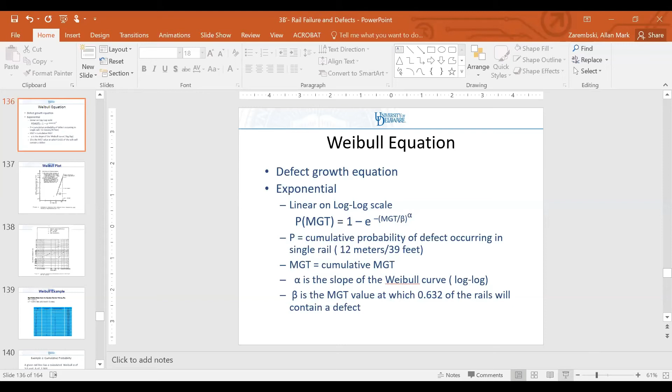Professor Zelensky? Yes. Sorry, it's way off here and here also. Oh, okay, now you're back. I saw your name pop up for a second and then you disappeared. So yeah, now, okay, I got you. Okay, thanks, Rima Lerner also. Oh Rima, okay, so let's see, who am I missing? Yogev Becher, are you there? And Ron Matskin. Okay, so the only two I don't have are Yogev Becher and Ron Matskin.

Okay, very good. So what I want to talk about now is I want to sort of finish up rail in the next 15, 20 minutes, which for me probably means it's going to be a half hour. And I want to get into track train dynamics and geometry. We can get to it today.

So we talked about fatigue defects and the theory behind fatigue defects, and we showed you all sorts of fatigue defects. The issue is with fatigue, wear is fairly uniform. If you have a curve, the curve is more or less going to wear the same. So when the curve reaches its wear limit, you're going to replace it, and that's the end of the business. You replace at the wear.

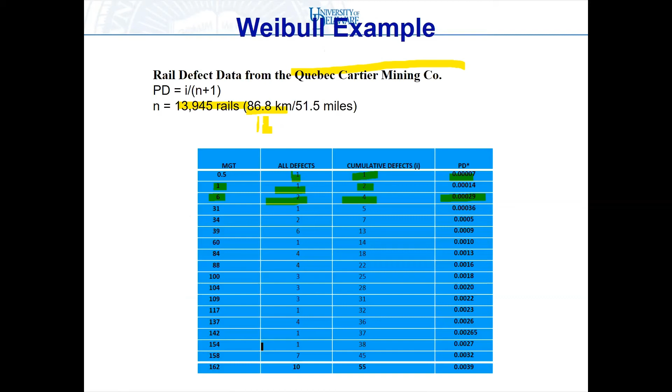What is the PD? PD is the cumulative probability, which is obtained by taking the total cumulative number of defects divided by the number of rails. So in this particular case, my cumulative defects is 4. I had 1 plus another 1 plus another 2, so I have 4 cumulative defects. I take 4, I divide it by the number of rails in the segment I'm looking at, which is 13,945, and that gives me 0.00029.

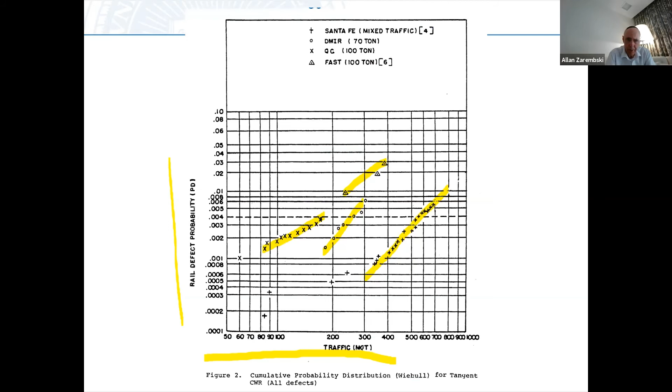And so I can come back here and I can plot it on this graph. And I plot each of my defects.

So for example, let's take at 100 MGT, I had 25 cumulative defects, that's 0.0018. So there's 100 MGT, and there's 0.0018. So you can see that data point right there.

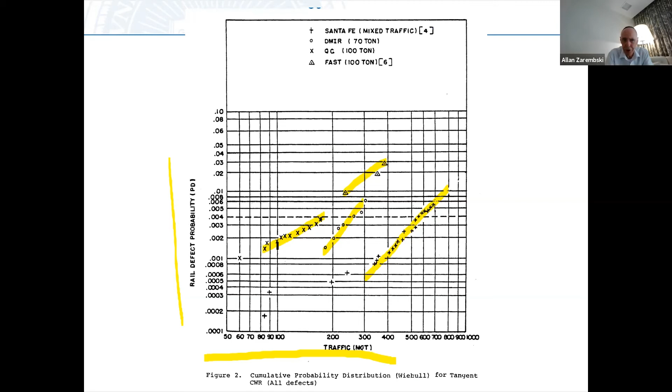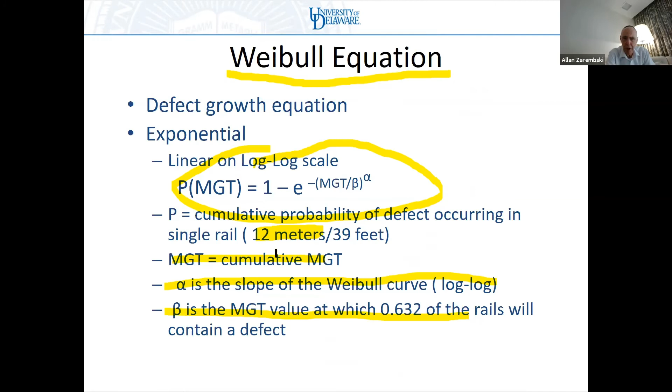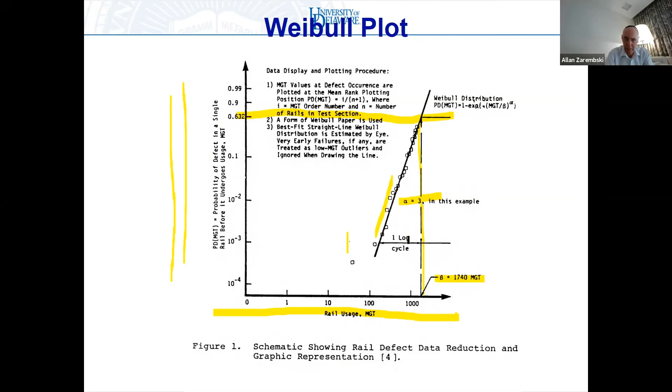And so with this, once I define this equation, I can predict forward when I have a cumulative number of defects. So to give you an example, I have a rail, I have a line, and I know from analysis of the data already that the alpha is 3 and the beta is 2000. Remember, the alpha is the slope of this line and the beta is the 63.2% intercept point.

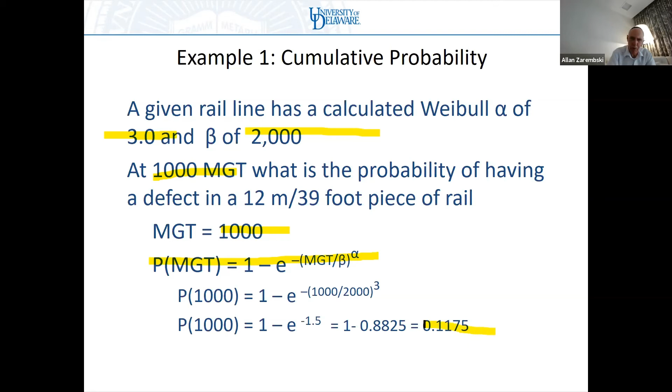So I know that alpha is 3 and beta is 2000. I want to know what's the probability of having a defect at 1000 MGT. So I want to project out and see what's my probability of having a defect. I go back to my equation, P equals 1 minus E to the minus MGT over beta, to the alpha. I use MGT equals 1000, alpha equals 3, beta equals 2000, plug it into the equation, and I get a probability of 0.1175. What does that mean?

That's the number of cumulative defects in that length of track. If I have 166 rails per kilometer—excuse me, this 0.1175 is cumulative probability per rail in the entire section of track.

If I have 166 rails per kilometer, which is what I normally get—if I take 1,000 meters in a kilometer, multiply it by 2, divided by 12, I'm going to get 166. So if I take 166 rails per kilometer and multiply it by this cumulative probability of 0.1175, I get 19.5 defects per kilometer.

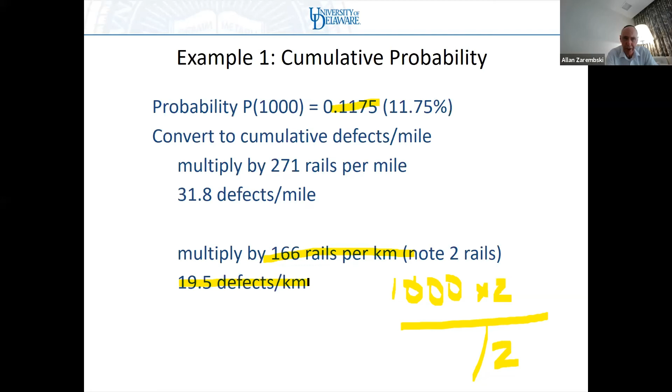So now that's a physically meaningful number. It gives me the number of cumulative defects per kilometer at 1,000 MGT. So I can look at 2,000, 3,000, 4,000 — I can predict forward. The problem with using cumulative probability is it implies that I have every defect from the start of the life of the rail onwards.

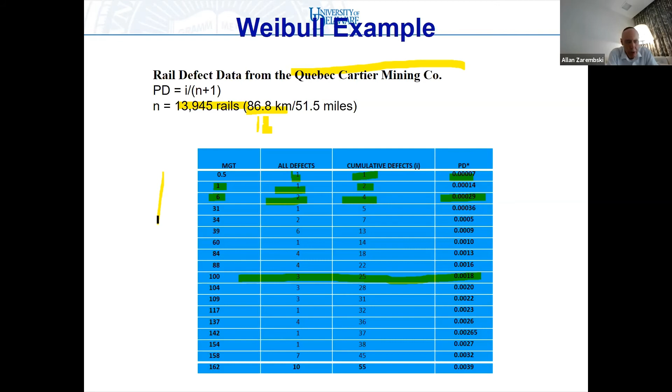Unfortunately, most railroads' record keeping isn't that great, so cumulative probability is a very difficult number to use because it's hard to get. So an easier type of number to deal with is what we call the defect rate, or the first derivative of the probability equation — the defect rate, or the number of defects per kilometer per year, or per kilometer per MGT, some sort of reasonable number.

Now, defects per kilometer per year is actually a very easy number to use because you usually have fairly decent inspection records in current times. Most railroads now have pretty good defect records. So if you look at the last 12 months — let's say you pick a section of track that's 50 kilometers long, and over the past 12 months you found 100 defects in that 50 kilometers. Then I have 100 divided by 50, so 2 defects per kilometer per year.

So that's a number that's a little bit easier to work with on a practical basis, so we tend to work like that. Now, the other thing that happens is, remember, the Weibull plot is linear on log.

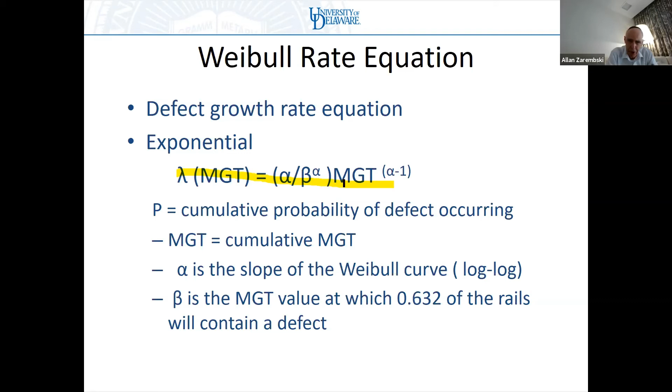So we therefore have a Weibull rate equation also available, which is the first derivative of that. And that is the Weibull rate equals alpha over beta to the alpha, times MGT to the alpha minus 1. Where lambda now is the rate, P is the cumulative probability, lambda is the rate, everything else the same. Alpha is the slope, beta is the intercept, MGT is the cumulative MGT of interest.

So let's do an example. We have the same rail line as before, alpha equals 3, beta equals 2000. I'm now giving you an extra piece of information, which is the annual traffic density of 25 MGT. So at 1000 MGT, same problem as before, what is the defect rate now? What is the slope of the cumulative probability curve? How many defects per mile per year, or per kilometer per year, am I going to get at 1000 MGT on this line?

Okay, so I calculate lambda using the equation I just showed you: alpha over beta to the alpha, times MGT to the alpha minus 1. So the lambda comes out to be 0.000375.

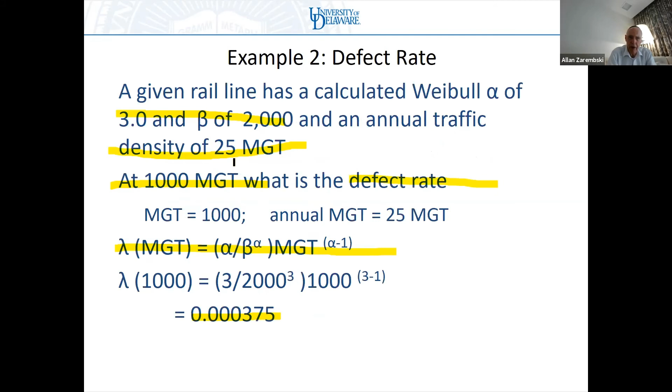And I want to convert that now into defects per mile per year or defects per kilometer per year. Let's work on defects per kilometer per year. So I have 166 rails per kilometer, that hasn't changed. A kilometer is 1,000 meters, times 2 rails on a track, divided by 12 meters, my defined rail length, and that gives me 166 rails per kilometer. My tonnage is 25 MGT short tons, which is 23 MGT metric tons, which I'm going to call MG tons here. So I take my 0.000375, which is defects per rail per MGT, multiply it by 166 rails per kilometer, and multiply it by 23 MGT per year, and I get 1.5 defects per kilometer per year, which is a very realistic type of number.

So going back to the 50 kilometers of track that I had before, this means I'm going to find 75 defects at the point when it reaches 1,000 MGT. Does everybody follow what I'm doing here?

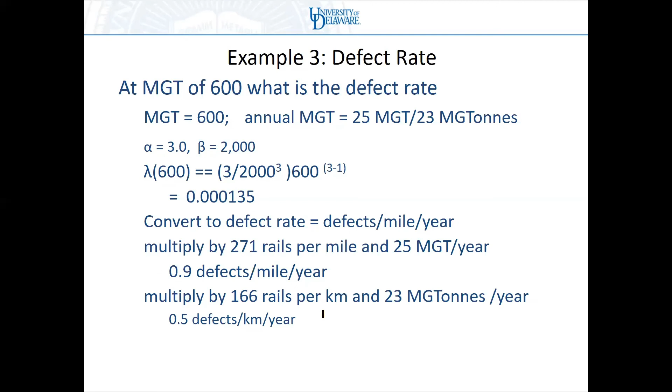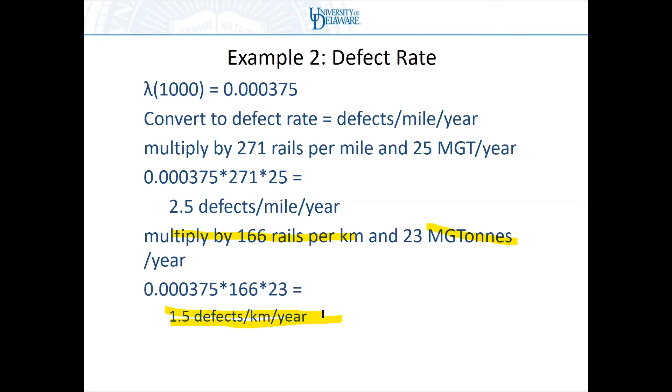Yes. Can I have a question? Yes. You had a question, you said? Are we talking about the 2 sides of the rail? Are we talking about the what? It's 1.5 defects per kilometer of rail, but is it for the 2 sides of the rail? Yes, yes, okay, this is both sides of the rail, correct? Because remember, I took 166 rails per kilometer for 2 sides. Okay.

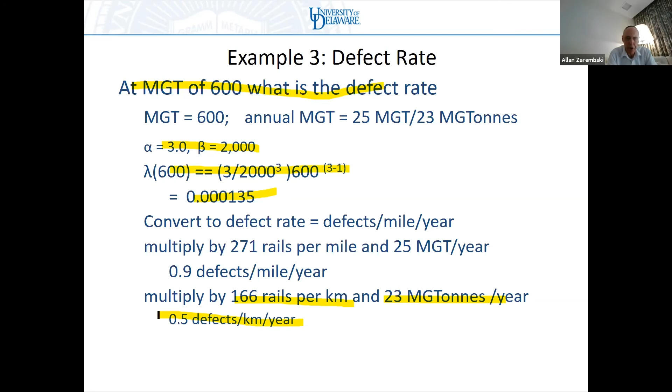So let's do a similar example at MGT of 600. Alpha equals 3, beta equals 2000. My lambda, which I just stick into the equation, is 0.000135. I multiply that by 166 rails per kilometer and 23 MGT per year, and I get 0.5 defects per kilometer per year. So that would be about 25 defects in a 50-kilometer segment of track. And that's not a particularly onerous number, one we have no trouble living with.

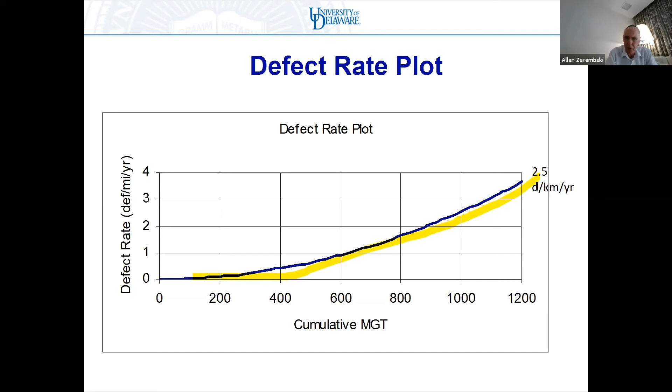So you can see in this particular plot, which is also for alpha equals 3, beta equals 2000, that at about 1200 MGT, I'm at about 2.5 defects per kilometer per year. That's a point where I start thinking about replacing the rail.

So how would we use this on a practical basis? Where you replace the rail, by the way, is a question of risk and economics, because there's a cost associated with keeping on replacing the rail. Pulling out a plug and replacing the rail is an expensive proposition. You have to increase your inspections as your defect rate gets up, and you have a risk of derailment. So somewhere between 2 to 3 defects per kilometer per year starts getting to the point where people think the defect rate is very excessive.

Well, how do I use my equations to predict forward? So again, I have enough data, so I know what my alpha and my beta is. I'm going to keep the same alpha equal 3, beta equal 2000. My MGT is 25.

Rails per mile is 271. Rails per kilometer is 166. So you can see I can start looking at what the defect rate is.

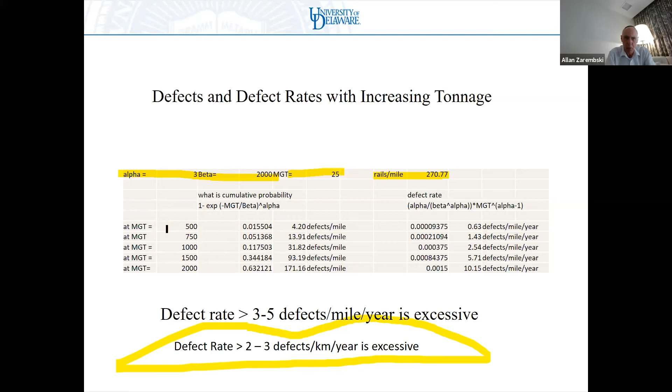At 500, I'm about 0.63 defects per mile per year.

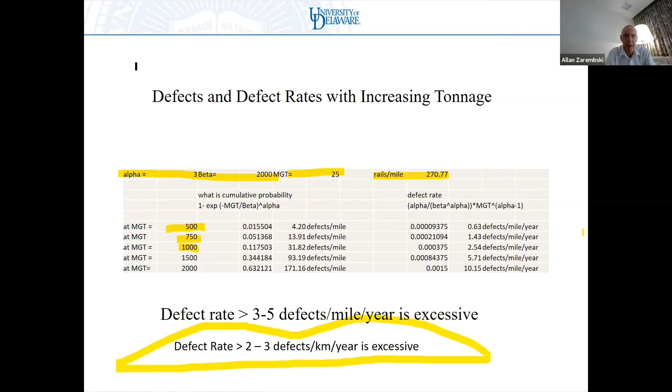At 500 MGT, I'm about 0.63 defects per mile per year, which is about 0.4 defects per kilometer per year. At 750 MGT, I'm about 1.43 defects per mile per year, which is about 0.8 defects per kilometer per year. At about 1,000, I'm about 2.5 defects per mile per year, which is about 1.5 defects per kilometer per year. At 1,500, I'm about 5.71 defects per mile per year, which is about 3.2 to 3.3 defects per kilometer per year. So somewhere in this zone, I'm going to go past 3 defects per kilometer per year.

So if I'm projecting forward, trying to figure out when I need to think about replacing the rail, it tells me I need to start thinking about replacing the rail somewhere between 1,000 and 1,500 MGT. So why is this important?

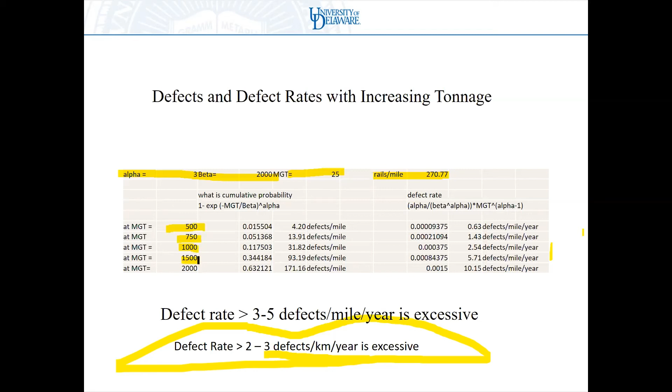And that brings us to the question of when should I be replacing rail? There are several major criteria for replacing rail.

If you're in jointed rail territory, excessive number of rail failures or excessive batter of the rail joints is the most dominant reason for replacing rail. And I said this the other day when we talked, if I have welded rail, my two main criteria are wear and fatigue.

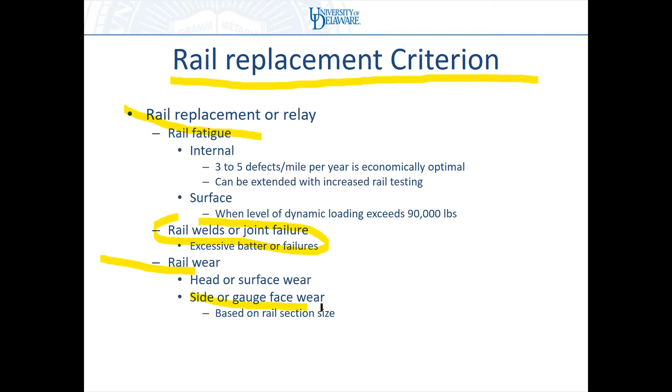Fatigue and wear usually kick into place on curves. Usually fatigue will override wear on straight track, not always, but many times, because on straight track I have head wear or top wear, but in curves I have side wear, and that tends to dominate unless I do a good job of lubrication or unless I put in a good premium steel, in which case rail fatigue defects start developing.

So when do we replace rail due to fatigue? As I said, internal defects — this is 3 to 5 defects per mile per year, or 2 to 3 defects per kilometer per year — is where people use this, even though I've seen railroads push this out significantly, going from 5 to 8. I've even been involved in studies where I found rail defects in the 10 defects per mile per year, or 6 defects per kilometer per year range, even though, to be honest, that scared me greatly because the risk of derailment is pretty high.

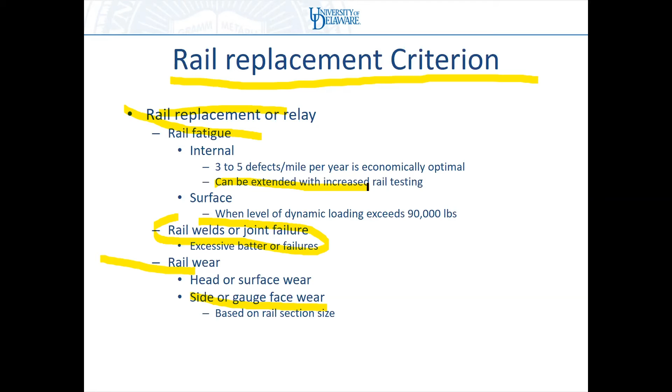Now, one of the things you can do to extend the life of the rail, to keep pushing out when you replace it, is increase your rate of fatigue testing, rail testing. So if you have 3 defects per kilometer per year, you may want to be testing 3 to 4 times a year. If you have 5 defects per kilometer per year, you want to be testing 5 to 7 times a year, to make sure you don't have any defects developing in between.

So the obvious question is, do I have any choice besides replacing the rail? Because replacing the rail is very expensive. The answer is there's a limited number of things you can do with rail. Rail is not the easiest thing in the world to work with, because it's strong, it's hard, and dynamically it's not an easy component to work with.

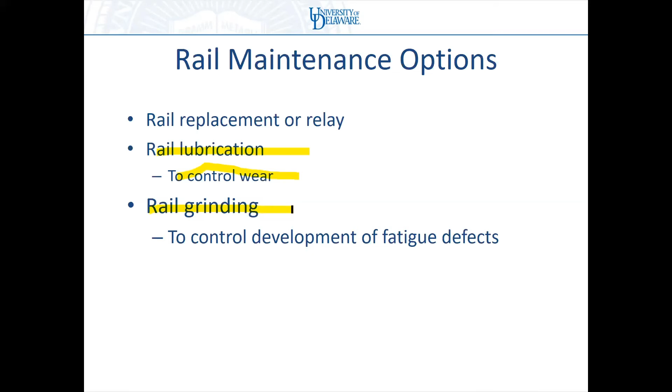So pretty much my major maintenance options for rail, other than replacement, are lubrication, which controls wear, and rail grinding, to control the development of fatigue defects.

So let's talk very briefly about rail grinding. I think I've mentioned this before - Israel Railroad a couple of years ago bought a brand new rail grinder, I think it was 25 million euros. It was supposed to have been delivered 2 years ago. Since I haven't been to Israel the last 2 years, I actually don't know whether it was delivered or not. I don't know if anybody out there knows.

Yes, the machine cost 13.7 million, has 24 stones, for tangent track and turnouts. Has it been delivered yet? The manufacturer is Speno. Oh, the manufacturer Speno. I'm sorry, you're right, yes, Speno. It's okay, I said Plasser.

The machine was delivered a couple of weeks ago. Oh, it was just delivered. Yes, because of COVID-19, that's what I heard about the delivery delay. But I have a big question - a particular question: how to deal with grinding from standard transversal profile to the anti-head check profile in a smooth geometry.

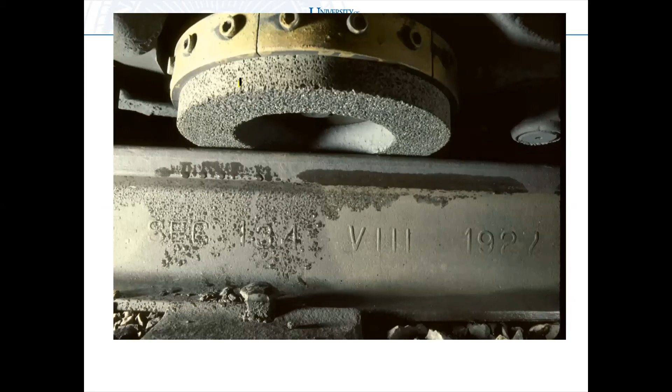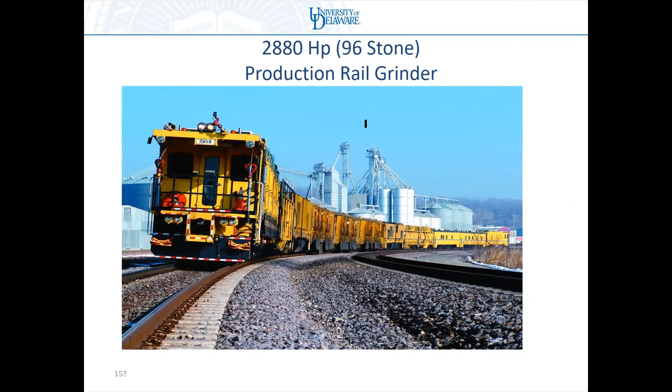So this is the grinding motor up here, this is the grinding stone - this is a consumable that lasts on the order of about a day. So if you have a 96-stone machine like this one, that means every day you're replacing 96 stones. That's probably one of the biggest expenses of a rail grinder. You can see how it grinds on the flat side of the stone.

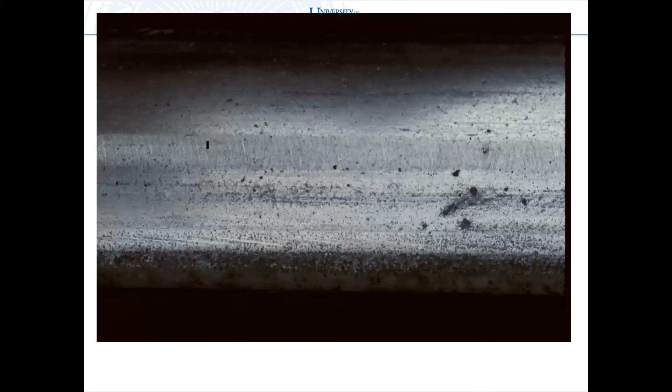What one grinding stone produces is a facet that looks like this. You can see the grinding marks, and this is about 8 to 10 millimeters wide up here. You can see this doesn't cover the railhead. So this is one stone.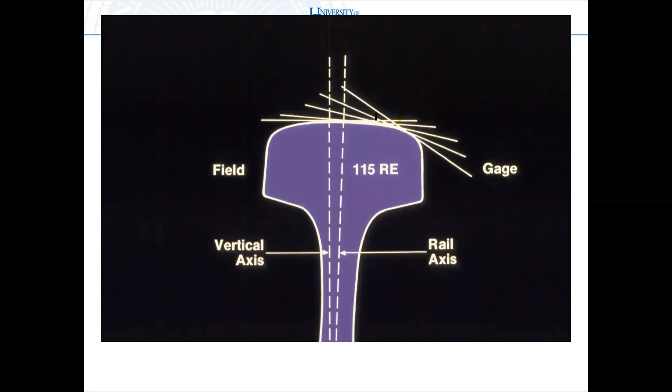So to cover the railhead, I need multiple stones, which is why I have 24, 48, 96. It determines how much coverage I have and how much metal I remove. And by rotating the grinding motor, you can see here, I'm changing the angle of the grinding motor.

I change the position of the grinding facet on the top of the railhead. Again, this is the top of my railhead. This is my gauge side over here. This is my field side over here. And you can see a 0 stone is not quite down the center.

0 is when the motor is perfectly vertical. But remember, the rail is canted, and a 1 in 40 cant on the rail gives you about 1.5 degrees of rotation. So if you have a zero motor, it's off. You're off a little bit from the dead center of the railhead because of that 1.5 degree rotation.

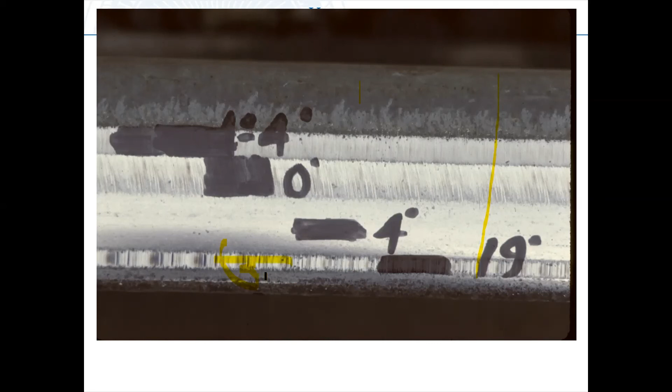You can see this is where a 19-degree motor goes. This is where, if I had a 25 motor, I would go over here. If I had a 32 motor, I would go over here.

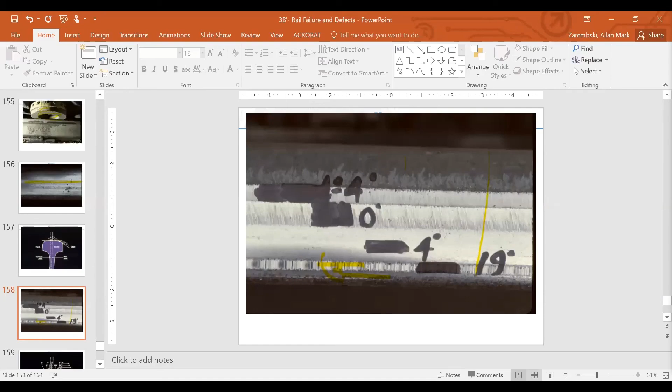This is a -4 degree motor, which means it's out towards the field side. The normal convention is plus angle is towards the gauge, minus angle is towards the field.

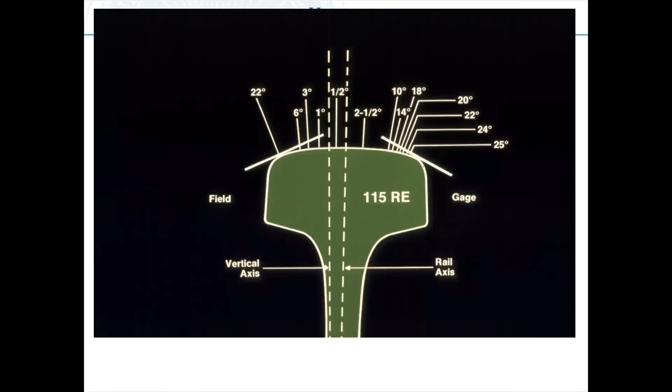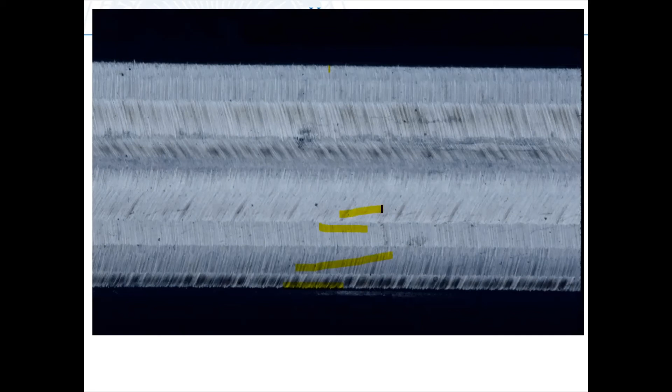By having a distribution of motors, which we call a grinding pattern, distributing the motors across the railhead, I can get coverage across the entire railhead. You can see the individual facets - there's one here, here, here, here. Also by putting multiple motors on top of each other, I can take more metal off from one location than another, and I do that to control the shape or profile of the railhead.

I'm not really going to get into that in great detail here because we have too much to cover. But I actually give a 3-day course, which I've given to Israel Railways a couple of years ago, and I've given around the world to multiple railways - U.S., Europe, Asia, everywhere.

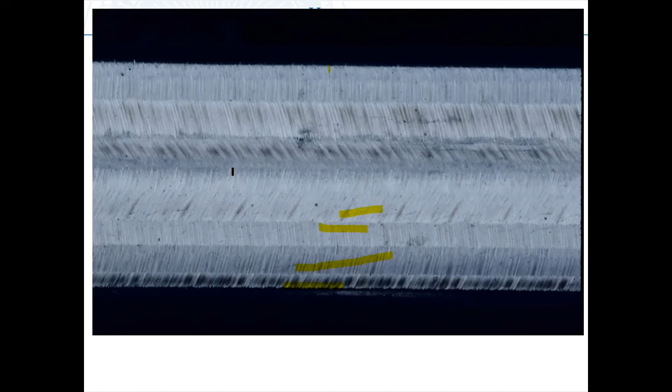It's a very effective technique for controlling fatigue defects, as I'll show you in a few minutes, because what you're doing is controlling the wheel rail contact. If you remember the wheel rail contact we were talking about earlier, and I was showing you those photoelastic slides - if I have excessive contact over here, I can grind off some of that metal and switch it from a 1-point to 2-point contact and control the stresses at the wheel rail interface.

And therefore control the development of fatigue defects. So all that boring theory that I throw at you actually has some very practical uses in the real world.

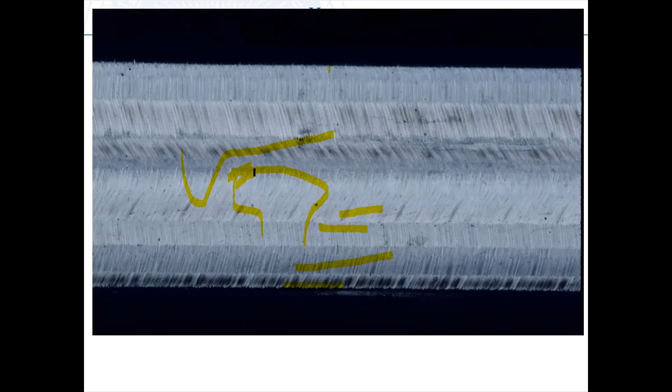In addition to internal defects, rail grinding also controls surface defects, such as corrugations. Everybody grinds corrugations - there are grinders for metros out there to grind corrugations, grinders for light rail or trolley track, and production grinders. So grinders are very effective in removing surface defects such as corrugations, gauge corner spalling, engine burns in the top of the railhead, etc.

Now, you also can control internal defects by controlling the wheel rail contact. So there are a couple of different ways to grind. Traditional grinding is a very slow maintenance operation where you grind multiple passes - each pass is every time you grind over the rail, you turn around, come back, make a second pass, turn around, come back, make a third pass.

And you're grinding at very low speed, 6 to 14 kilometers per hour. That's sort of the traditional defect grinding. Some of the new generation grinding trains have a high-speed capability that allows them to perform what's called preventive or maintenance grinding. In traditional grinding, you're taking off about 1/4 to 1/2 of a millimeter per grinding operation.

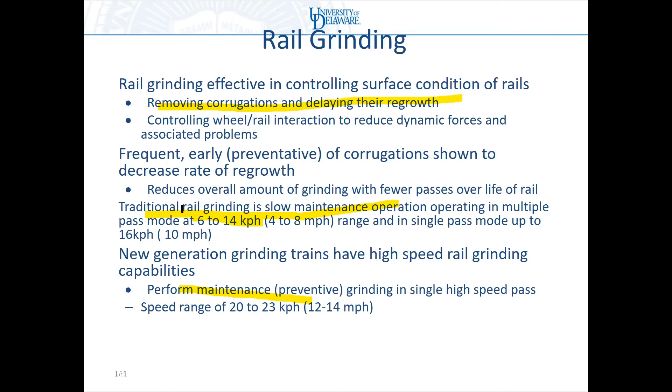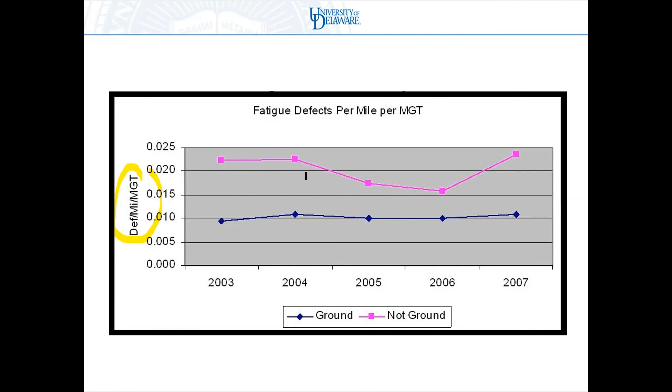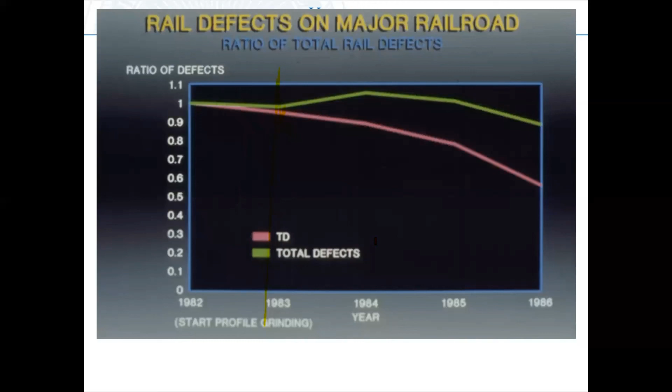This is what we also saw in this line. This is where grinding started, right around 1983, so this is a very old slide. This was another major U.S. railroad where we looked at the introduction of rail grinding, and we very quickly saw a reduction in defects by about a factor of 2 over a period of about 3 to 4 years. On this particular railroad, we also saw a reduction in broken rail derailments by a factor of 2 as well.

Okay, so I'm going to leave - can I ask you a question? Yes, I'm going to ask for questions now before I leave the subject.

What is the main reason that due to grinding you have less defects? Okay, remember we talked about fatigue as cumulative damage. Remember I went through the entire cumulative damage theory where we calculated the number of cycles to failure - you needed 2 million cycles at one stress, 500,000 cycles at another stress, but it's always multiple cycles of loading. So what happens with grinding, two things grinding does.

Number one, it changes the wheel rail contact geometry, so it actually reduces the contact stresses at the top of the railhead. So when I reduce my stresses, I move back up the SN curve, so my number of cycles to failure go up. At higher stresses, I need fewer cycles, fewer MGT to fail. If I reduce my stresses, I require more cycles to fail, so that's a higher MGT.

That's one. The second thing it does: I accumulate fatigue damage in the top of the rail. If I grind off some of that rail, I'm removing the rail that has a lot of cumulative damage, and I'm running on new rail that has less cumulative damage. So I'm actually removing the more highly damaged metal and running on less damaged metal. Both those factors come into play.

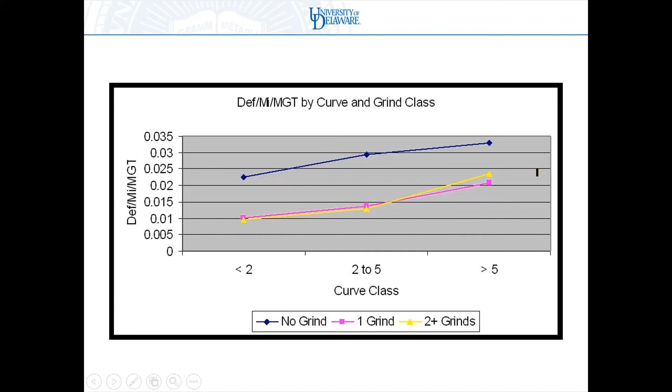Okay, let's stop here. Let me go into my next presentation: track train dynamics.

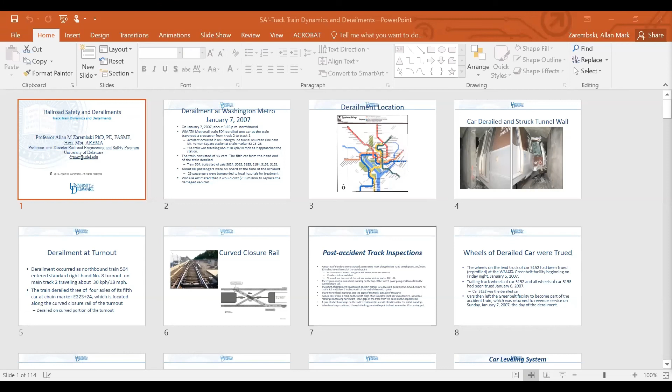All right, so now we're going to talk about track train dynamics. Just to get everybody's appetite going, I'm going to give you a little derailment example, and then we're going to use that as a walk-in.

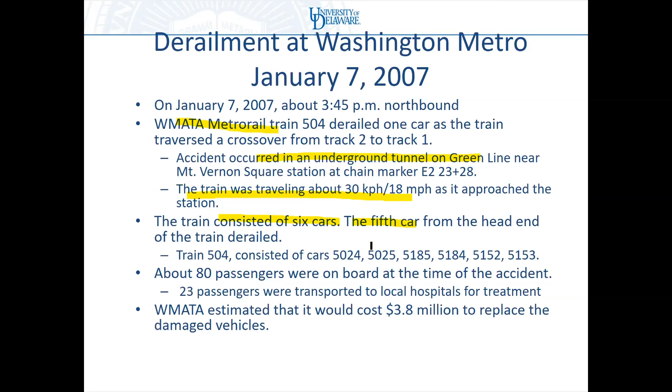So the first 4 cars went over the location where it derailed without a problem, which by the way is not all that unusual in track train dynamics type of behavior. In this particular case, 23 people were hospitalized, and there was about $3.8 million worth of damage to the vehicle, so it was a little bit of a messy one.

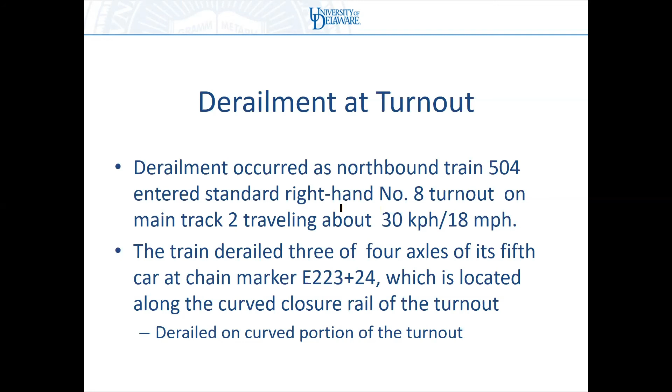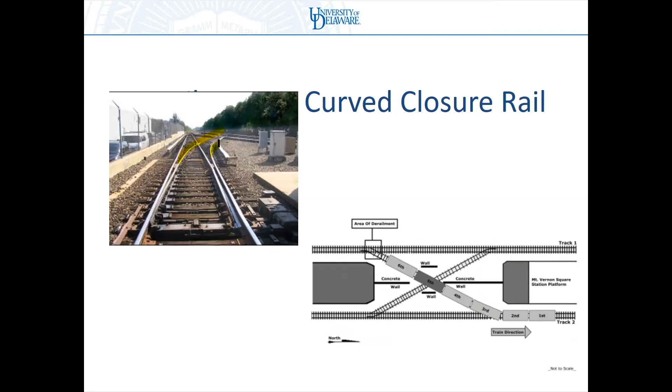This particular one derailed at a turnout. The 5th vehicle derailed 3 out of its four axles. It derailed on the curved portion of the turnout. It turned out to derail in the curved closure rail right over there. This was obviously underground, as you can see, but you can see the layout of the tracks. I just wanted to show you that.

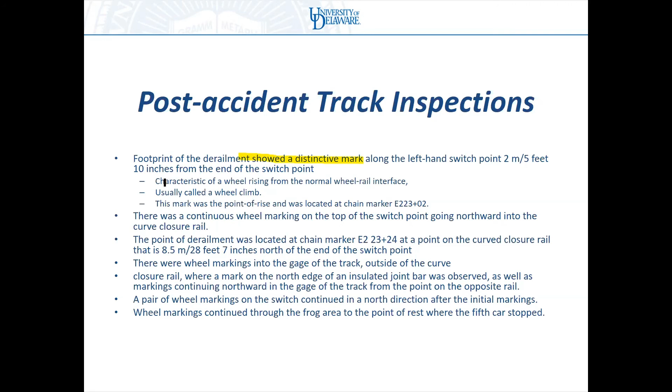In this particular case, there was a distinct wheel climb mark, characteristic of a wheel rising from the normal wheel-rail interface. It was about 2 meters from the end of the switch point. Then there was a continuous mark on the top of the switch point, showing the wheel going on top of the rail about 2 meters from the end of the switch point, and a continuous wheel marking on top of the rail. So the wheel was running on top of the rail for a little while, and then it derailed about 8.5 meters north of the switch point.

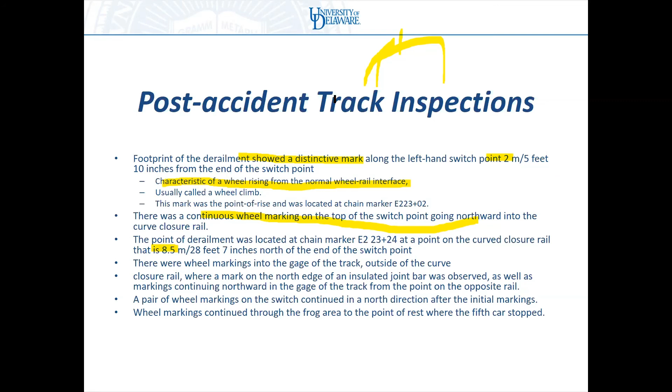Typically, where it climbs the rail is not considered the derailment point. The derailment point is where it goes off the track. There are wheel marks on the gauge side of the track, etc. So there are all sorts of wheel marks.

Now, one of the things that happened in this particular case, we're going to come back to this, but we already talked a little bit about the Nadal equation, is that the wheels of the derailed car were trued. So we haven't really spoken about wheel maintenance yet. That's something I sort of leave for the wheel part.

But truing is a process by which when a wheel gets worn, so the flange gets very worn, I machine back and I machine a new wheel profile over here into the existing wheel. I restore the thickness of the wheel flange, which is this dimension over here. And I can run that wheel now for another 30, 40, 50,000 miles, or 50 to 100,000 kilometers, let's say.

So the wheel has been trued, which means it's been machined. Whenever you machine something, you always leave a little bit of a rough surface, so your coefficient of friction is high. If you recall from the Nadal equation, and we'll show this again in a few moments, when the coefficient of friction is very high, you run the risk of your L over V threshold for wheel climb dropping. Your risk of wheel climb increases. So these newly trued wheels had a higher risk of wheel climb.

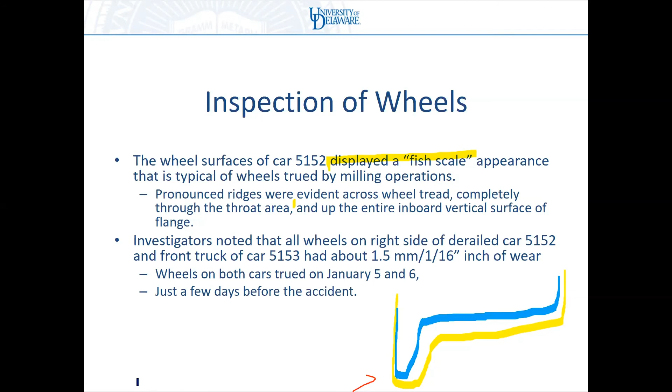So what happens is either I have to throw the wheel away, or I introduce a process called truing, which is a machining process. When I true a wheel, I come in here and I machine away all this metal. It's actually going more like this. I'm going to machine away all this metal, and I'm going to end up with a new wheel profile further higher up. My diameter of the wheel is smaller because I removed some metal, but it's still within my allowable range. Now I have a full profile, so I can run the wheel. The process of machining that wheel is called truing.

And it's a very standard procedure. Most railroads and most metros in the world do it. It's a fairly standard procedure for extending the life of wheels. So what happens is the truing process generated a very rough surface, that's this fish scale appearance, picture of that, right over here. You can see it looks a little bit like the grinding marks I showed you earlier on the rail. This is almost equivalent to grinding a wheel, except we're not using a grinding stone, we're using basically a machining process, a cutting tool to cut the metal off the wheel.

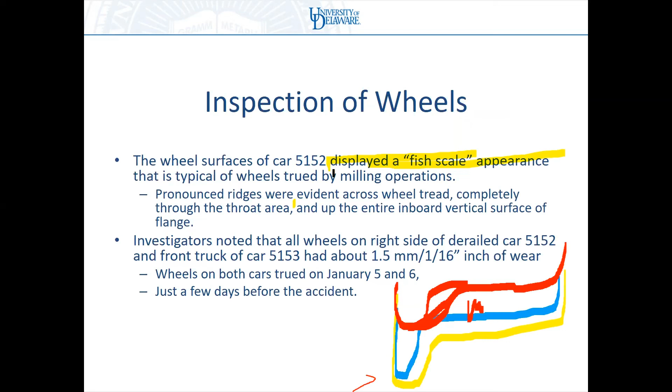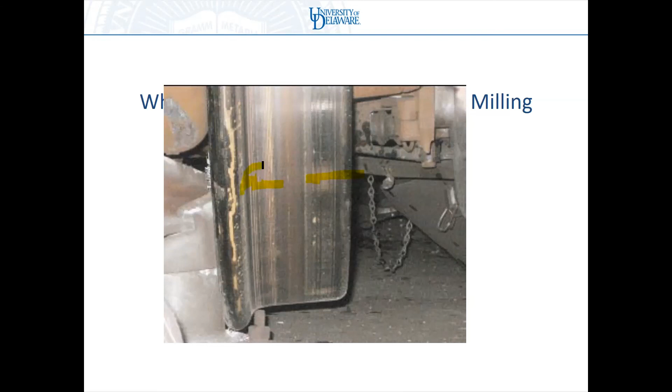So we had this very high friction right over here, and it actually extends all the way down into the flange. So the high friction was all the way down here, and that contributed to the derailment.

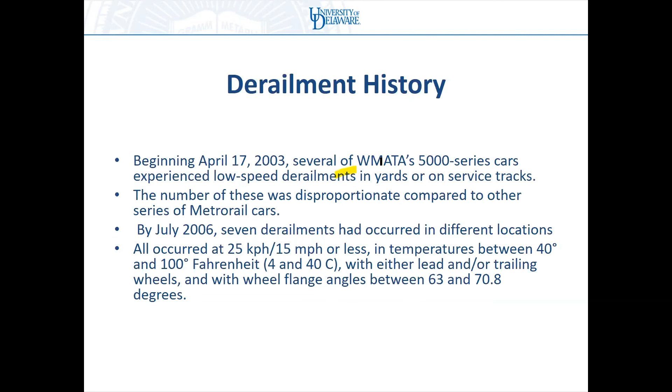Now, on top of everything else, these particular cars also had a derailment history due to the system of balancing the car leveling system. So in addition to every other problem they had, these cars also had a problem with leveling. What a car leveling system does is distribute the weight uniformly upon all wheels. So if I have a bogie with 4 wheels, I want to have 25% of the bogie load on each wheel evenly.

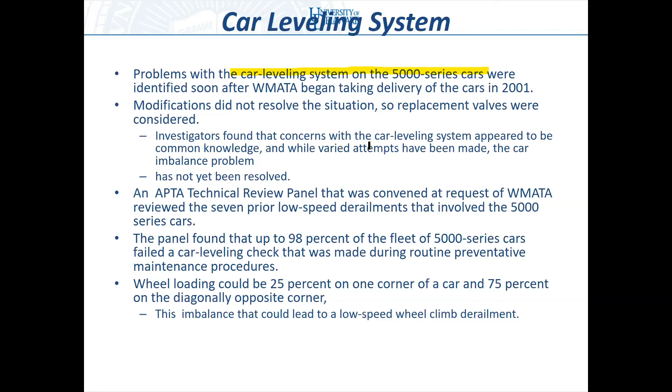And if I have 8 wheels in a car, I want a uniform distribution of my load. In this particular car, it wasn't quite leveling, it wasn't distributing the load evenly. In fact, they found that the wheel loading was so bad that where it should have been 50-50 wheel loading, it was varying to 25-75 instead of 50-50. So it was showing non-uniform loading, and this also contributed to the derailment.

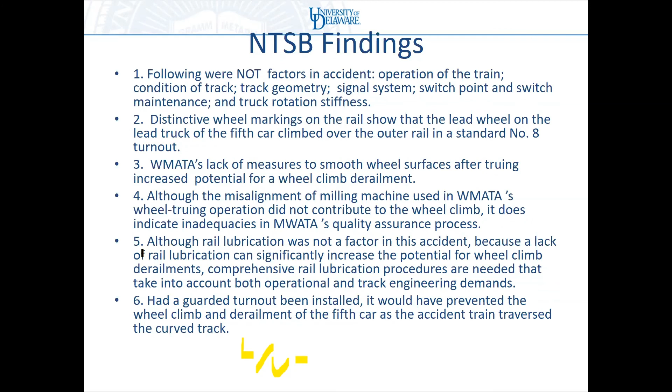So this was a case of wheel-rail dynamic behavior associated with 2 things: high L over V because of low V, because I had an unloading. So if my L over V ratio, if my V is low, then my L over V is high. And then I had a low L over V wheel climb threshold because of the rough surface of the wheel, the high coefficient of friction. So this was a wheel climb derailment.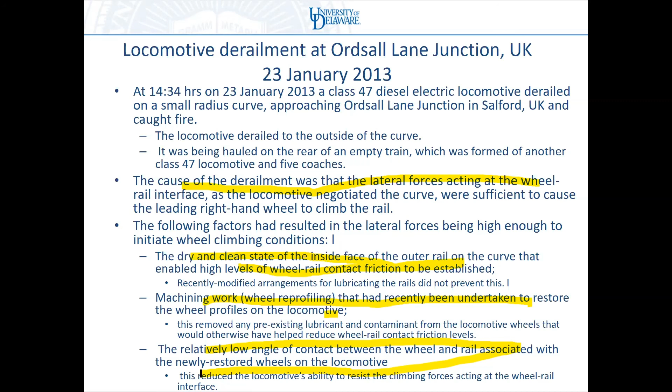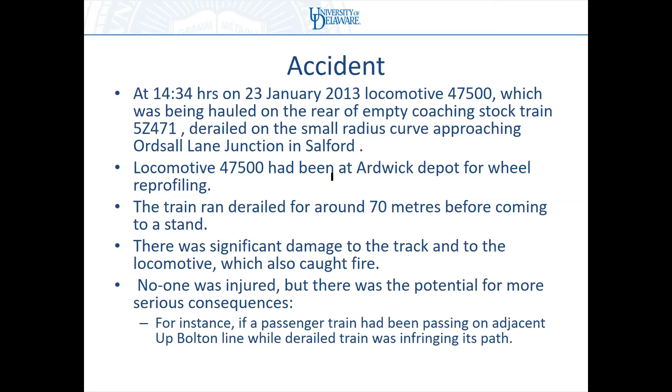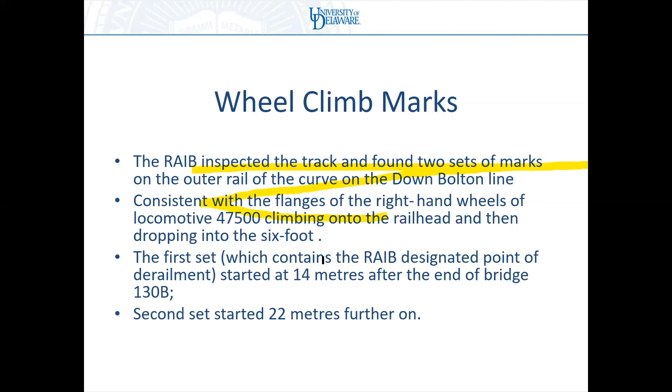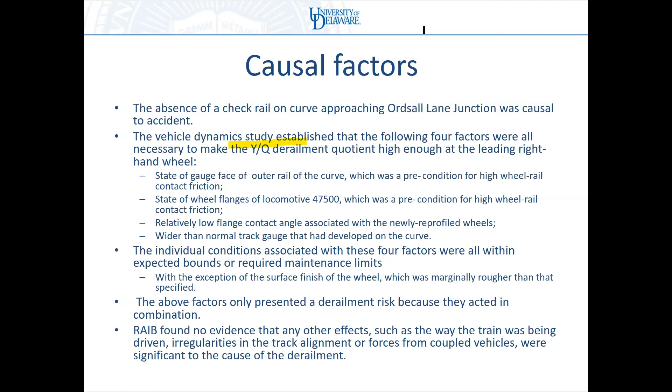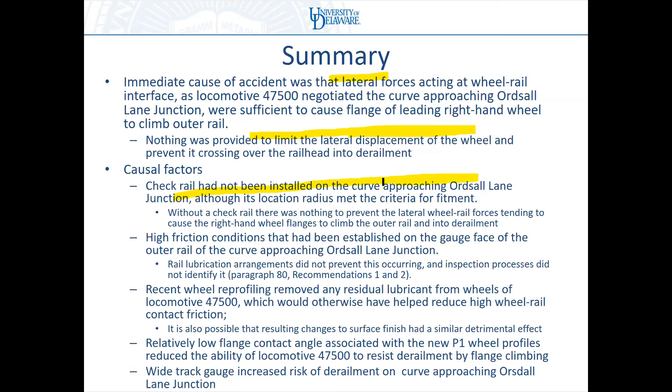So again, the same cause. By the way, notice we're talking about Y over Q. Remember correctly, Y over Q is just a European way of saying L over V. So the immediate cause of that accident was high lateral forces. There was no check rail, so there was no guardrail, nothing that prevented it from going across the derail. In fact, that was a finding of the British Railway Network Rail afterwards, that they should have had a check rail there. They didn't have it. High coefficient of friction, same issue we talked about before, which means low L over V threshold. Recent wheel reprofiling, high coefficient of friction on the wheel, rough surface, low L over V threshold, low contact angle, wide gauge, or both are just generated in high lateral forces, high L over V.

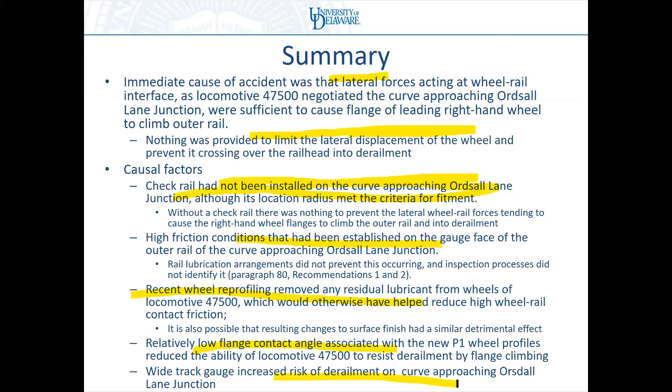And so that takes me to the topic I want to spend the next hour on, which is track train dynamics. Track train dynamics refers to the interaction of different dynamic forces when a train moves over a track structure. It's very often related to the forces at the wheel rail interface, which we've been talking about, but it also includes broader vehicle motion as well. So track train dynamics really includes both the wheel rail interface and the vehicle track interface, and they are different.

So let's take the WMATA case as an example. The wheel climb part of the WMATA accident was a case of wheel rail interface, so that was the Nadal behavior where the wheel was climbing the gauge face of the rail. Same thing with that British derailment, exactly the same thing. But there was another element in the WMATA system, and that was the car leveling system. Remember, the car leveling system did not uniformly distribute the vertical loads on all wheels, it had non-uniform distributions. That in turn resulted in a rocking of the vehicle. So once we introduce that type of rocking of the vehicle, we have an issue that becomes very significant, and that is track train dynamics. That's the vehicle track interaction portion of track train dynamics. Because when you're introducing the rocking of the vehicle, you're away from the wheel rail interface, but you still have vehicle track interactions.

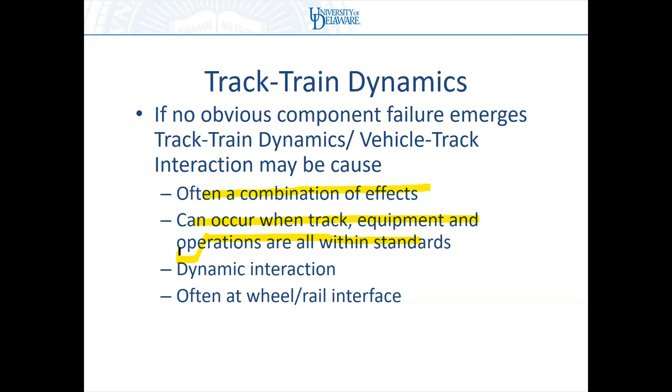These type of occurrences can even occur when everything is within standards - this is one of the parts that bothers people. I was involved in a derailment in San Francisco BART where the track was within standards, the equipment was within standards, the operations were within the operating rules - everything was within standards. They were all within the edge, just on the edge of the standards, but within standards. Yet the derailment took place. That was because the interaction at the edge of the track, the equipment, and the speed of operations was such that it generated sufficient track train dynamics. So that's an issue we sometimes see as well.

Okay, so I'm going to throw out a whole bunch of names to you, and then we're going to go through these in time. In fact, after the break, I'm going to show you a few movies to do this. So I'm going to give you a brief introduction here, and we'll go through it a little bit later. These are 7 different types of track train dynamic derailments. Let's see what I have here. Okay, so let's keep going here.

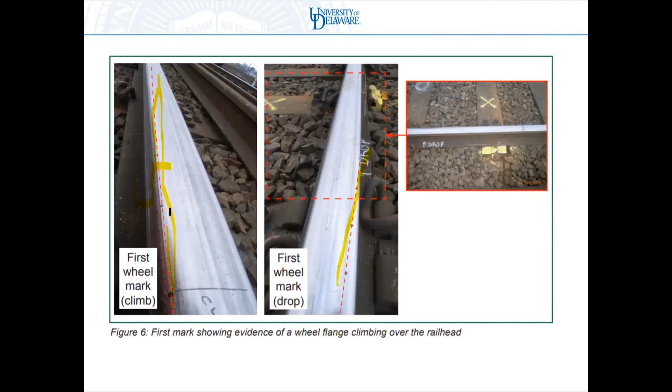So I have wheel climb. Wheel climb occurs when my wheel is flanging the rail. Usually I have a very high coefficient of friction, either on the wheel or on the rail or both, and literally my flange climbs up the top of the rail, just like I showed you here. This is wheel climb - the flange is climbing up, up, up, up, up, up, you can see till it's gotten to the top of the rail. That's wheel climb, and that's a wheel-rail contact problem.

Next one out of the chute is wheel lift. Wheel lift is different from wheel climb because it occurs when the flange is not in contact. Wheel lift occurs when there's some sort of rocking action - we'll talk about different types of rocking action later, such as harmonic roll or dynamic roll. But it's a rocking action where think of the axle set rocking, so this goes up, this comes down, this goes down, this goes up. And then obviously I'm going to get a lift. If I lift and go around the curve and come back down on top of the wheel, or come back and there's no rail there, then I have a derailment. So that's wheel lift.

Rail rollover is when the forces, my L over V forces, are so high that they literally roll the rail over. Now they can be full rail rollover where it actually turns it over on its side, or it can be partial rail rollover where I rotate the rail sufficiently that the wheel flange drops down into the web of the rail, and all of a sudden my wheel is running over here on the web of the rail, and that knocks the rail fully over. So that's rail rollover.

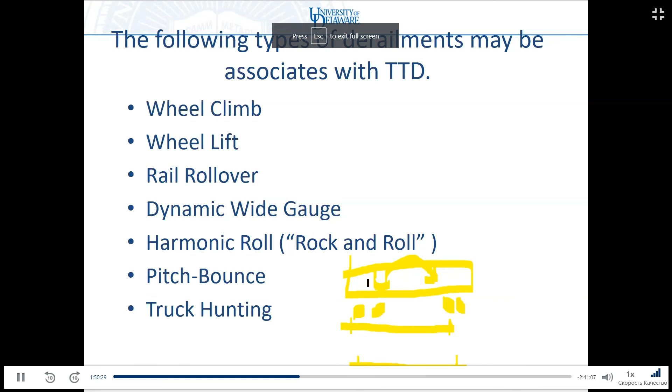Pitch and bounce is a phenomena that occurs with square joints. Pitch and bounce happens if my track has joints or battered welds opposite each other. What happens is my wagon now rotates around the y-axis, so my front is pitching and bouncing, my rear is pitching and bouncing. We see this more in square joint type applications with joints opposite each other, but it's again a harmonic behavior where you resonate and generate this pitch and bounce type of behavior.

The last type of track train dynamics we're going to talk about is truck hunting. Truck hunting happens when my axle set, going down the track, moves dynamically from side to side - literally it moves to the left and comes to the right, comes to the left, comes to the right. This is a different type of resonance phenomenon. So all three of these are resonance phenomena, harmonic resonance phenomena in three different planes: one is around the longitudinal axis of the track, one is around the lateral axis of the track, and this one is laterally on each individual axle or bogie.

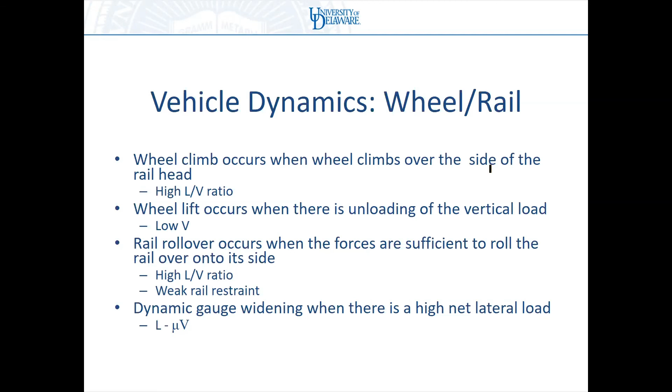So let's take a few minute break here because I have - let me see where my movies are.

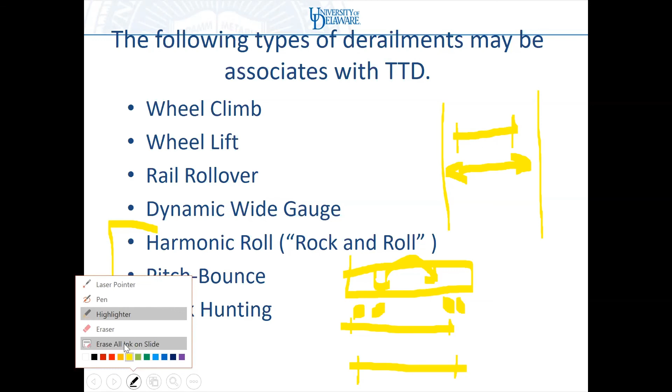Excuse me, Alan - I didn't understand the wheel lift and the harmonic roll, can you explain again? Okay, let me see if I have a better picture of that. Let me explain it again and then I'm going to show you. You'll actually see these in the movies I'm going to be showing you in a few moments, but let me explain it to make sure you're prepared. Okay, so wheel lift and harmonic roll are related to each other.

Let's look at the end view of a wagon. Here's one rail, here's another rail, here's my axle, here's my wheel, here's my wheel. If I have a series of staggered joints, I'm going to generate a rocking of my vehicle. It's coming down - first it comes down on the right rail, then it lifts, then it comes down on the left rail, then it comes down on the right rail again. So it's rocking from side to side. This happens at a critical speed, and because it's excited by these staggered joints or staggered battered welds, that generates this rocking action of the vehicle.